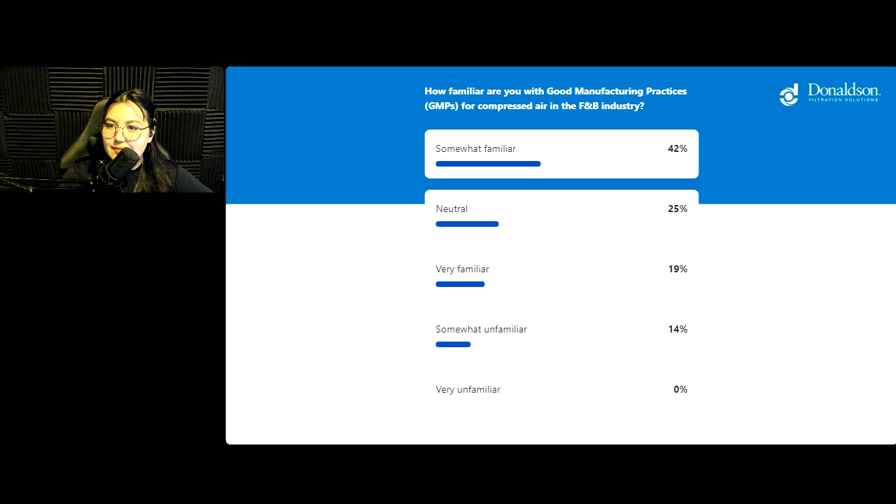All right, thanks everyone. Hopefully, no matter how familiar you are, you will still learn something new today. First off, we're going to get into what some of the regulatory standards in place are for the food industry, as well as why they exist and how they came to be.

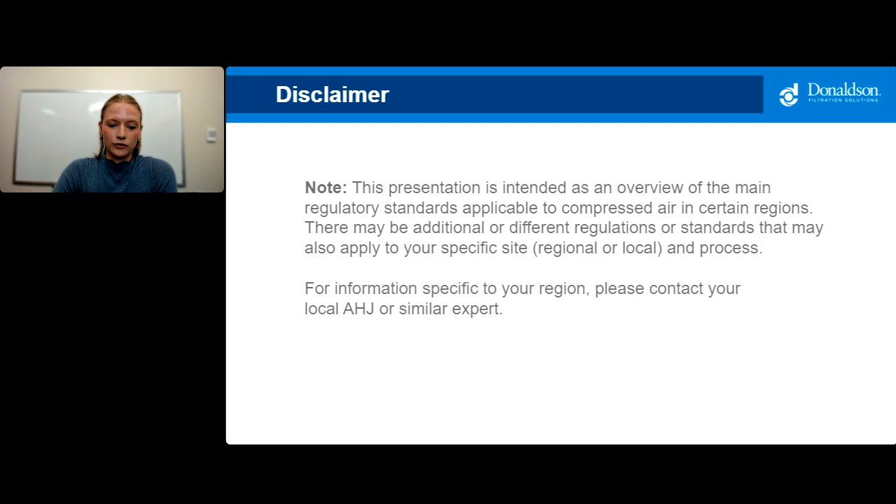Before we get started, we want to remind you that this presentation is intended as an overview of some of the regulatory standards applicable for compressed air in certain regions. As there are many regulations globally, there may be additional or different regulations or standards that may apply to your specific process. Please contact your local authorities having jurisdiction for more information specific to your region.

Regulatory standards for compressed air that comes into both indirect and direct contact with food and beverages have only been explicitly outlined since the International Organization of Standardization, or ISO, implemented 8573 in 1991. Since then, several governing bodies have developed standards such as IFS, FDA, SQF, just to name a few, that specify the filtration needed to stay compliant with these regulations.

Clean, dry air, regular testing, and point of use need to be at a certain level of filtration. While some are more specific than others, as you can see from this table, by following the GMPs outlined here, you'll ensure that your facility is compliant with even the tightest regulations.

Clean, dry air ensures not only less downtime due to system leaks or the need for equipment maintenance, which in turn keeps production running smoothly, but also mitigates the risk of contamination of products that may result in illnesses or recalls.

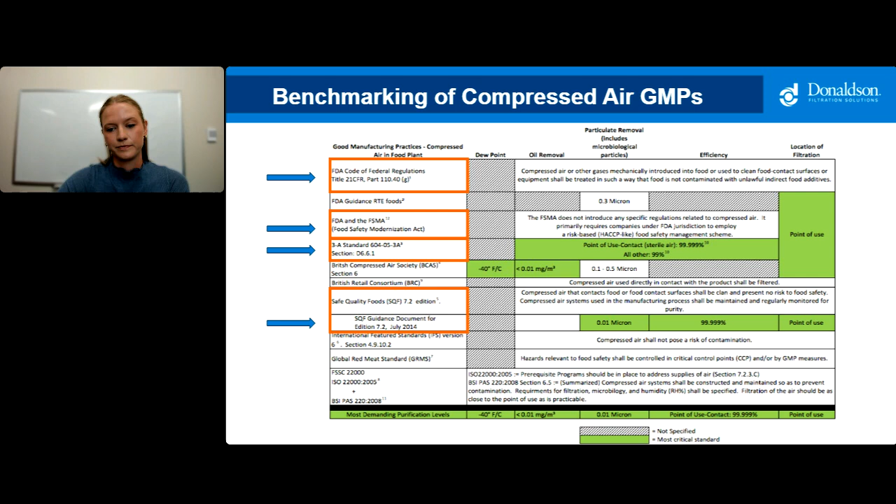The IFS food standards focus on food safety and quality management systems that are designed to help companies comply with legal requirements and customer expectations. They cover areas such as food safety, traceability, and product labeling. These standards were developed by the German Retail Federation in collaboration with retailers and industry experts.

Standard for... got into the next slide there.

The FDA food standard: while the FDA does not have specific regulations for compressed air in the food industry, food manufacturers are responsible for ensuring the safety and quality of all components of their production process, including their compressed air. By following good manufacturing practices and implementing proper maintenance procedures, food manufacturers can help prevent contamination and ensure the safety of their products.

The FDA Food Safety Modernization Act was enacted in the US in 2011 with the aim to prevent foodborne illnesses and improve food safety by shifting the focus of the industry from responding to contamination incidents to preventing them before they happen. One of the main components of the FSMA is the establishment of preventative controls for both human and animal food production. This requires facilities to implement a risk-based food safety management scheme to identify and address potential hazards in their production processes.

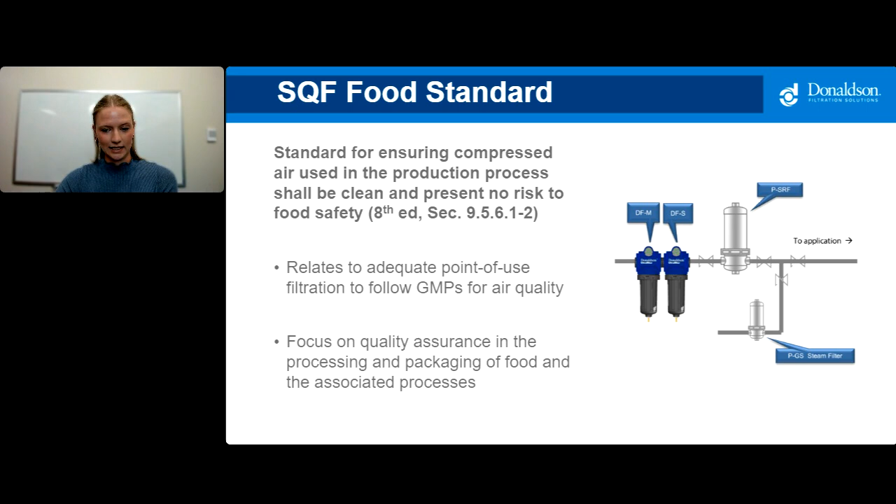Next up, the British Compressed Air Society, or BCAS, represents manufacturers, distributors, and users of compressed air in the UK. Together with the British Retail Consortium, they developed the UK Code of Practice for Food Grade Air in 2006, which focuses on three main areas: contact, non-contact high risk, and non-contact low risk.

The first two are held to the same standards shown, while the latter is set as its own category so that the facility's plant air is not held to such a stringent standard. The BCAS also publishes statistical information about the state of compressed air equipment in the UK.

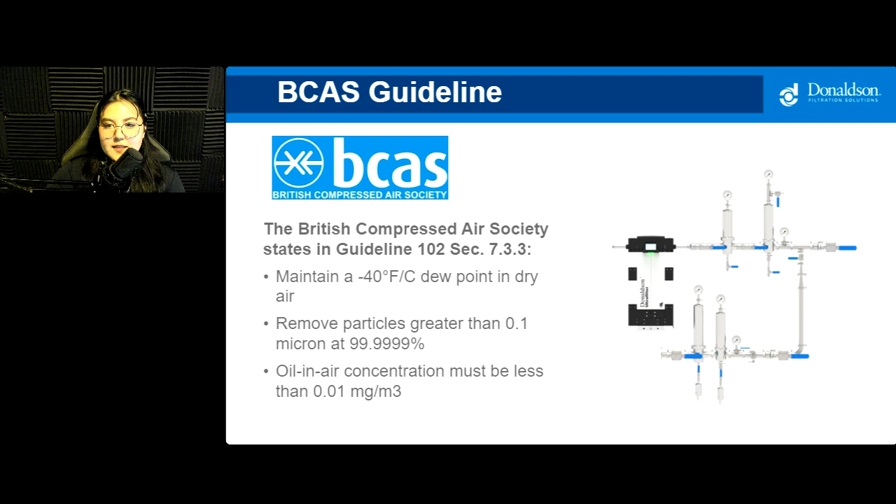The question this time is, how frequently does your facility review and update its GMP protocols for compressed air systems? Annually for A, B every couple of years, C every 5 years, D only when there are regulatory changes, and E, we do not have a regular review.

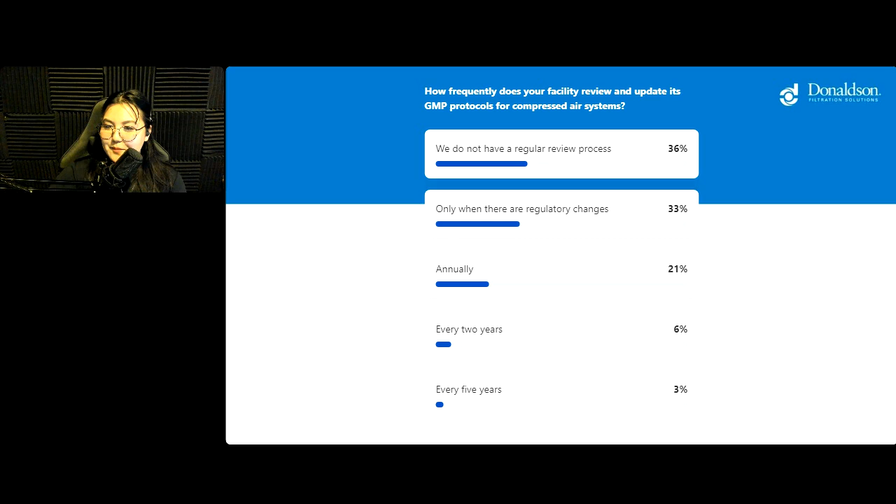All right, now that we understand what standards are in place and what regulations to follow, we can get into how to achieve those standards in your facility. And this is just a reminder that as questions come up during the presentation, feel free to keep putting them in there so we can address them at the end.

So we'll start with the industrial side of compressed air, which is classified by the ISO 8573-1 standard. Ambient air in the facility contains contaminants in the form of dirt, moisture, and oil, and all can cause issues downstream, especially when the vapor condenses at various points across the system. As a sterile filter at your point of use is not designed to remove various particulate, only microorganisms, it's really important that they're removed upstream.

Compressed air is considered a utility and can often be overlooked when a facility is developing their hazard analyses.

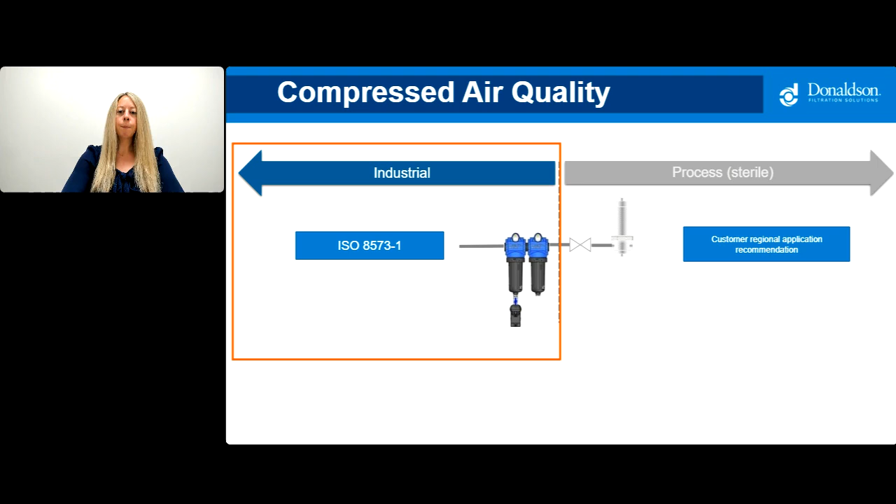The ISO 8573-1 sorts compressed air quality into different classes based on the maximum allowable concentrations of particles, which is in column A, water, which is in column B, and oil in column C, present in the air.

And using the table, you can determine what equipment you need in place to achieve the necessary air quality for your specific application. For example, the BCAS standard is 221 for both direct and indirect food contact, where non-food contact compressed air has a more relaxed 242. So the lower the numbers, the tighter the spec is going to be.

And Class 0 requires defined specs outlined by either the user or the supplier and is more stringent than Class 1, but there has to be some definition in place to comply with that.

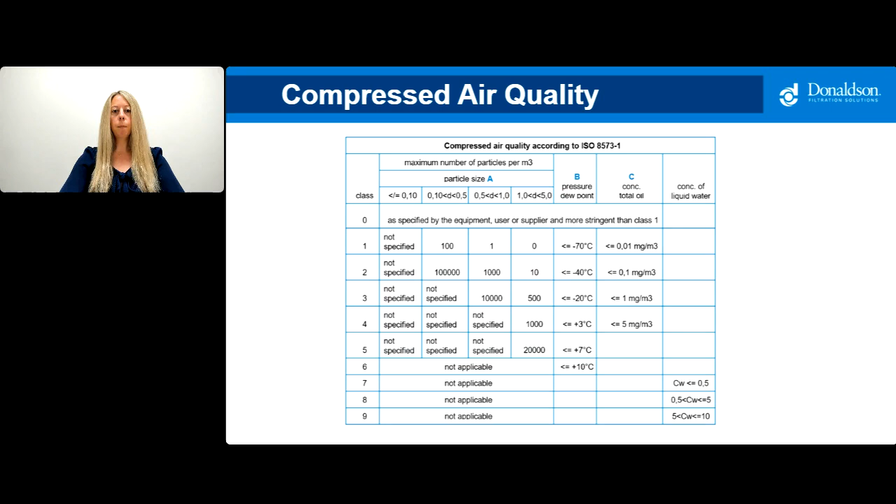Depending on the parameters of your current system, you'll select the filters you need to help you achieve the chosen ISO class depending on the following factors: what kind of compressor you're using, is it oil-free, and what type of dryer.

For example, the highest class the refrigeration dryer can produce is 4. So an adsorption dryer would be needed downstream for any critical control points. If you're looking at plant air or tools, a refrigeration dryer is fine.

And then are there any filtration steps upstream of your critical points of use? Performance data of the filters themselves are compared against another ISO standard, 12500, which ensures it's validated and will filter air in compliance with the class that you select and need to be able to fit.

The housing combination and filter combination best for your facility will depend on where they're installed, but to meet or exceed the standards that Julia just outlined - SQF, GFSI, CFR Title 21 - you'll have to have a particulate filter, a coalescing filter which removes oil and oil aerosols as well as any solid particulate, and an active carbon stage which removes oil vapor, hydrocarbons, and any odors from compressed air.

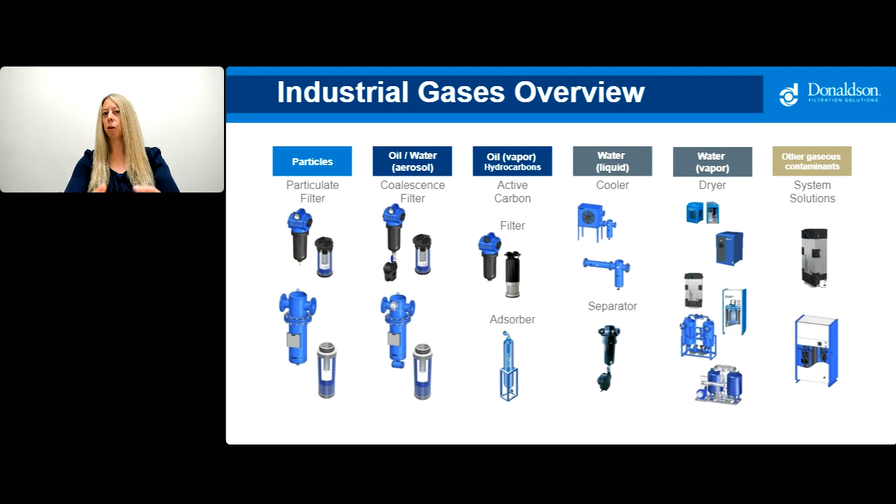Sometimes these stages can be combined, but it's important to look for that ISO 12500 standard to know that it's validated for what you need it to do. If the line is going to be steamed in place for sanitization, the housings will have to be stainless steel, and the filter elements may change, but their function and the order of install will remain the same.

In addition to providing the required pre-filtration for sterile air, the production of clean, dry air keeps fouling of equipment to a minimum, which makes sure the facility keeps running smoothly and efficiently, so you avoid downtime and added maintenance cost. Important parameters include oil and moisture content, as well as any filtration upstream. These factors will determine which filters are needed to remain compliant further down the line.

The filtration discussed previously will be coming directly off the compressor or storage tank, or in line both upstream and downstream of the dryer. That depends on the installation location and class required. For instance, if you've got point of use that's going to be outside, you would have your adsorption dryer inside, and then other things in between that and the point of use that can handle any temperature swings. If we move into the sterile side, the final point of use filter will be in a sanitary stainless steel housing.

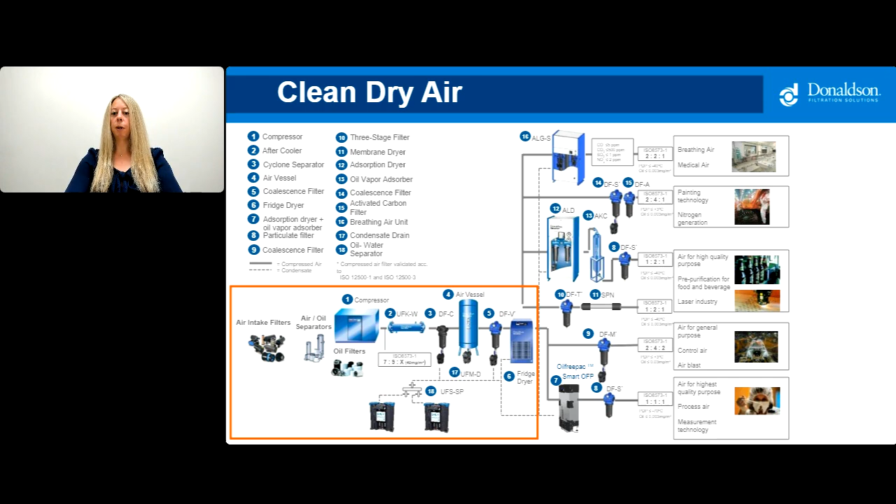This is an example. It shows a setup or installation of an air filtration system. The type of dryer chosen will depend on the quality of the air you'd like to achieve. A refrigerant dryer might be a more economical choice, but can only lower the dew point to around 3 to 5 degrees C, or up to class 4 - sufficient for most industrial and plant air applications or tools.

In instances where the more critical classes of clean, dry air or sterile air are needed, an adsorption dryer is necessary to hit that negative 40 dew point. As class 1-2-1 air is seldom required throughout your entire facility, the adsorption dryer and subsequent sterile air filtration can be sized and installed closer to point of use.

This point brings us to the next poll question regarding use. Seth?

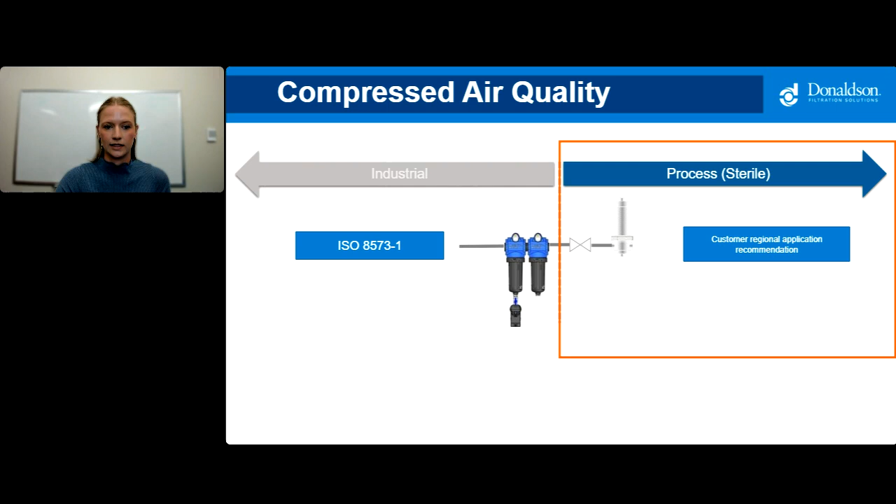Contaminants can be introduced into the process from many different sources. Airborne particles such as dust and dirt can enter the system from ambient air. Oil and lubricants can come from the compressor itself or other fluids used in production. And of course, personnel and operators can bring contaminants from outside the production area if the proper precautions aren't taken.

Microbiological contamination is the most critical, which is what we are removing with sterile filtration. Other important steps to remove these microbiological contaminants are proper clean in place and steam in place procedures.

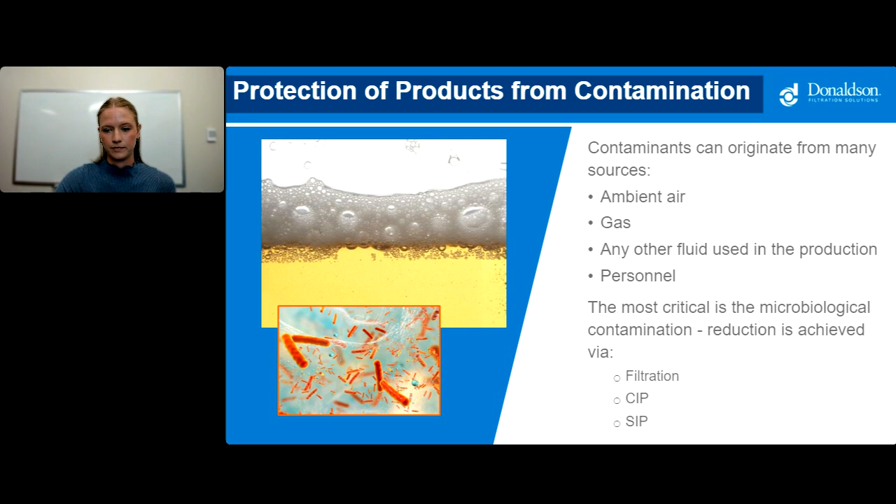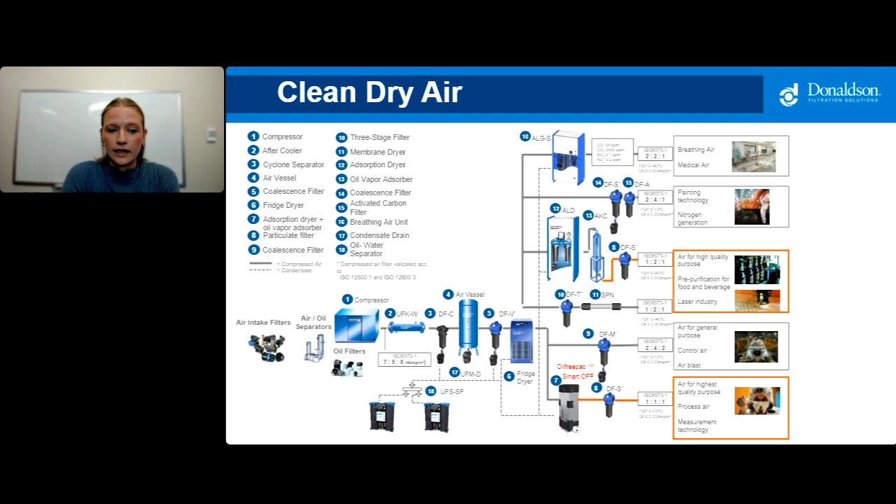So now, how clean does this clean dry air have to be? This depends on where it's installed and what it will be used for. Looking at the right side of this process map, we see that specific applications require different levels of compressed air. For example, the highest quality, class 1-1-1, is used for things like process air and measurement technologies. This allows 100 particles between 0.1 and 0.5 microns per cubic meter, and only one particle between 0.5 and 1 micron per cubic meter. For reference, the human eye can see things as small as 40 to 50 microns. This class of air also requires a dew point equal to or less than minus 70 degrees Celsius and less than 0.01 milligrams per cubic meter of oil vapor.

So the type of product that you're producing, whether it's wet or dry, for example, has a lot to do with the quality of air that is necessary. So it's important to ensure your point of use air is up to code based on your specific product and regional area, and that you have a maintenance plan in place in order to not fall out of compliance.

So next, Catherine is going to talk to you about how periodic line audits can help you maintain integrity and why it's beneficial for you to do so. But first, Seth will introduce one last poll question for the audience.

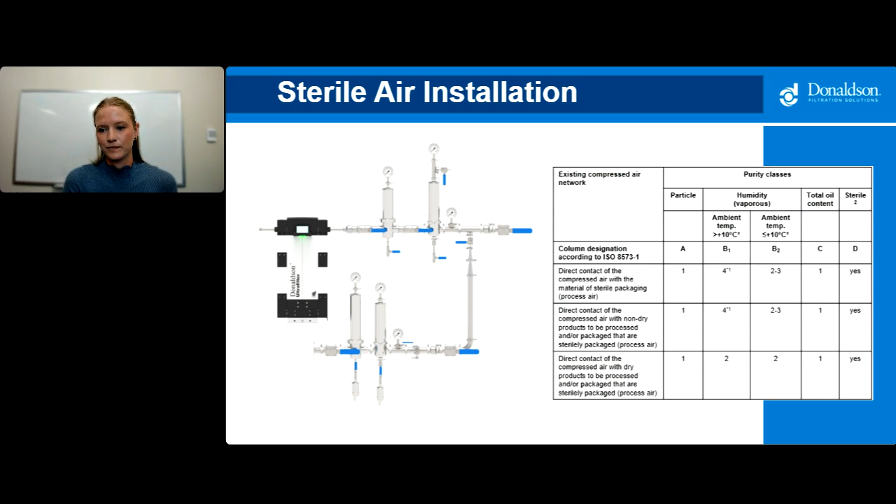All right, so the question for the last poll is, what is your concern regarding the filtration of compressed air in your facility? There's quite a few different answers here, so please pick the one that is most related to you. So we have A, ensuring compliance with food safety standards. B, maintaining consistent air quality. C, reducing maintenance costs. D, extending the lifespan of equipment. E, improving overall production efficiency. And F, other. And if you're just joining us, welcome.

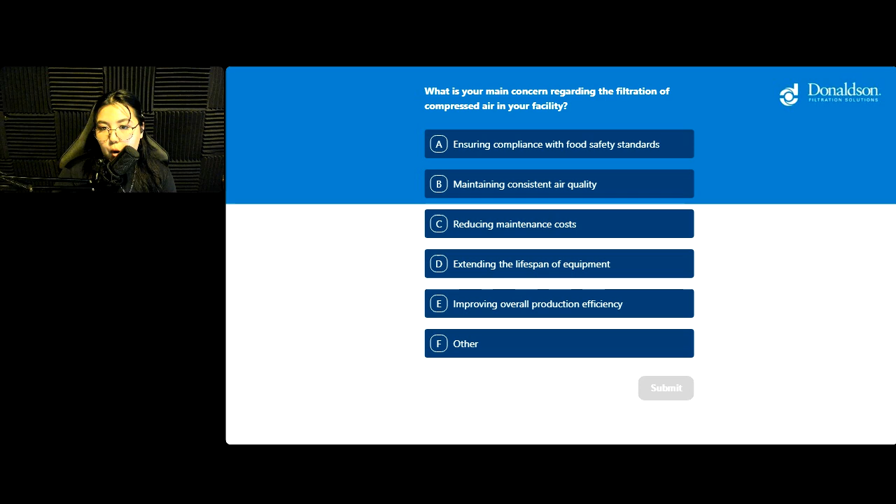We're currently running a poll and getting everyone's thoughts on filtration concerns. Now, I can see the majority has inputted their answer, so let's take a look at the final poll results. And here they are. You should see them on your screen. Very interesting. And this is a great note to end on, and it gives us a clear picture of your thoughts and experiences.

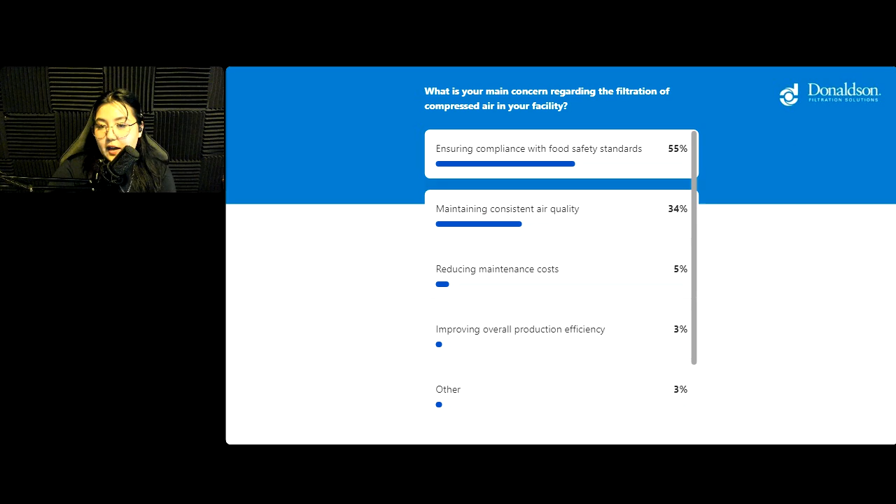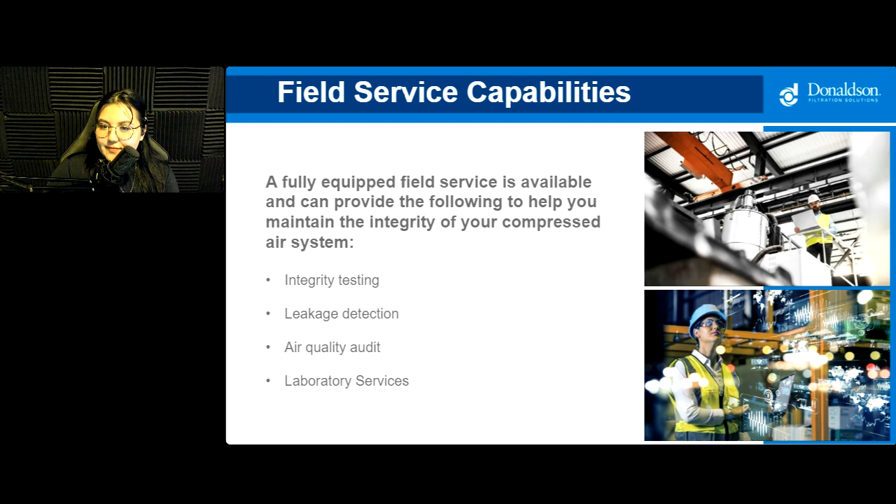And with this final insight, I'd like to pass it back to Catherine one last time. Right, given that most people are concerned about keeping with compliance, something that we can offer, or that it's important to look for maybe in a partner when you're looking at your compressed air system and how to stay in compliance, are kind of what their services are.

So capabilities of any field service teams to look at your line integrity, and what that means not only for cost savings in terms of efficiency and the way that the plant is running, but also keeping in line with all the different standards for on-site filter integrity testing, documented results, periodic line audits.

You can determine areas of any potential concern along that line. If the line expands or you're adding different points of use, then having an eye or sometimes like fresh eyes over the line can really help you see anything that you might want to take care of.

It could also help identify where losses can occur, such as condensate drains, and offer solutions that not only cut air loss during discharge, but also assist with more effective and environmentally sound condensate management.

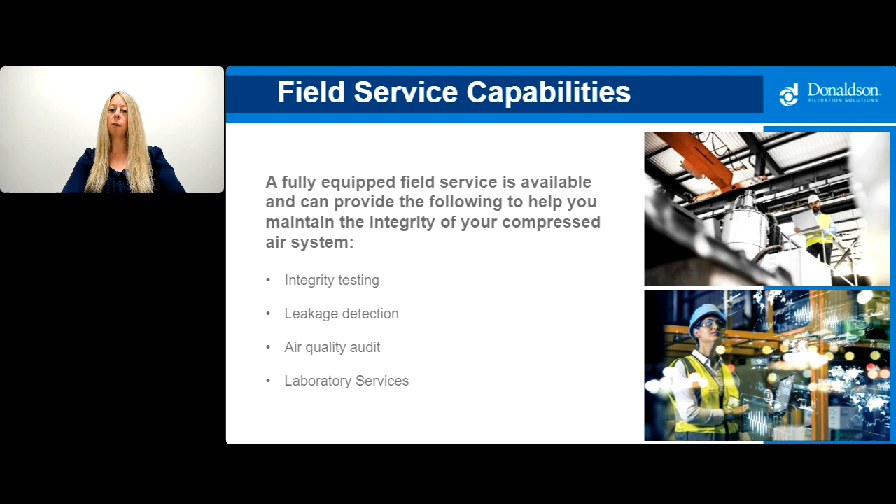Aside from the regulatory compliance, another factor to consider in your compressed air system is the operational efficiency. As a utility, one of the most important parameters is the differential pressure generated across the compressed air treatment. And higher differential pressure translates to a higher load for the compressor and thus higher energy costs.

On average, for every 1 bar of differential pressure, there is about a 10% increase in energy cost. This is important to bear in mind when you're sizing your system as well. The various components are designed for certain flows to keep the strain and pressure differential as low as possible, and therefore as efficient as possible.

And to this end, the field service team can help determine an efficient preventative maintenance schedule for your facility, which takes into account energy use, system demands, and filter cost.

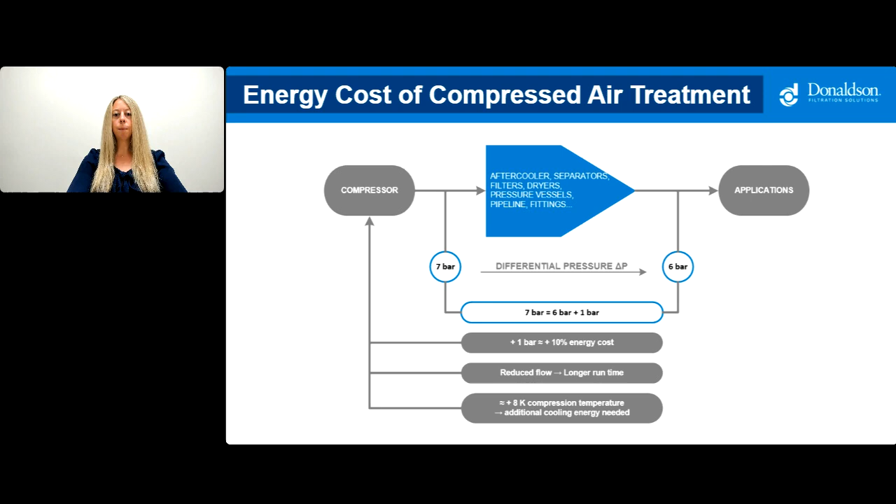Any air quality assessments include bacterial counts and quality measurements, such as residual oil and particle content, volume flow, and working pressure, as well as flow velocity within the system.

This will conclude the lecture part of the webinar.

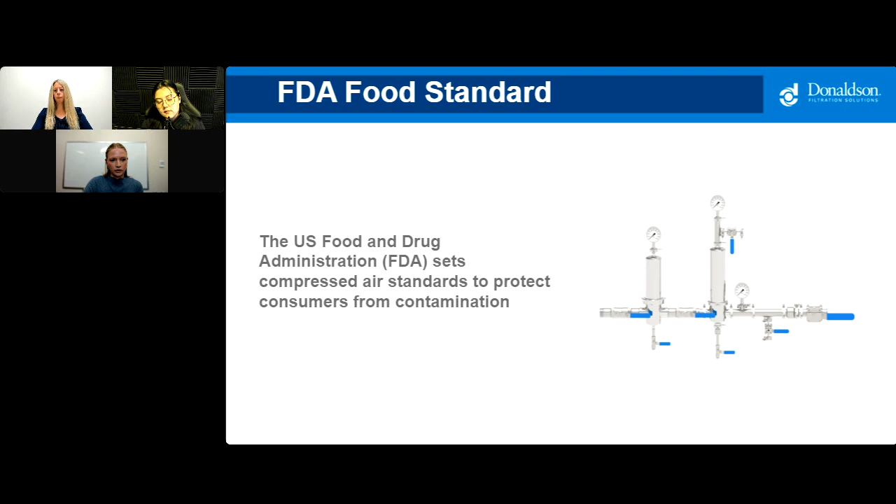So they don't necessarily have specific regulations for compressed air in the food industry. If we want to go to the next slide, this is FDA governed, so the FSMA food standards. So it's going to depend on what your product is. It's probably, if it's food contact, probably 121 or 111 quality air that you're going to need.

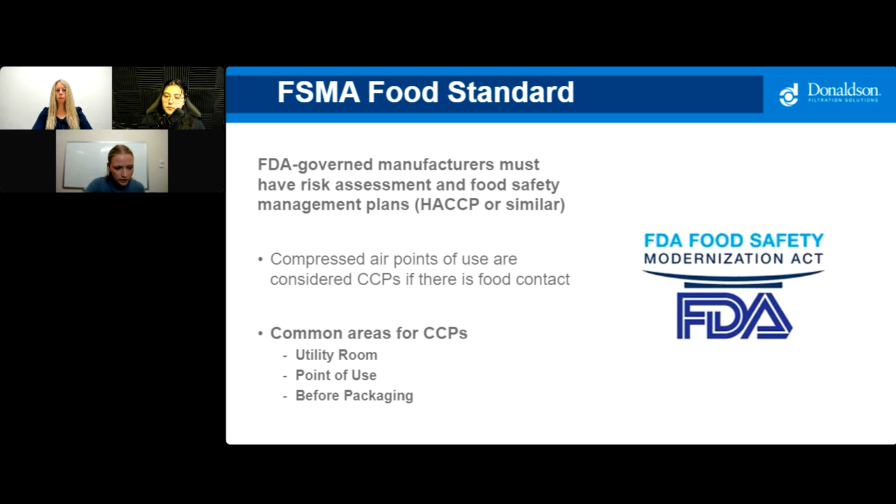The FDA is a little tricky because with the Food Safety Modernization Act, you're required to have these HACCP plans in place, but unless it's like a dairy 3A standard, or you're conforming to another set of standards that outline specifics, it's just expected that you have some sort of audit plan in place. And that's something, depending on the product and the use, we can help you determine to make sure you're following all these best practices.

Great, that was a fantastic question, thank you both for your answer. And I'll ask this final question before we close our live Q&A session. Does a lone sterile filtration system effectively remove microbial contamination, or does it have to be collaborative with bottle cleaning for liquid contact?

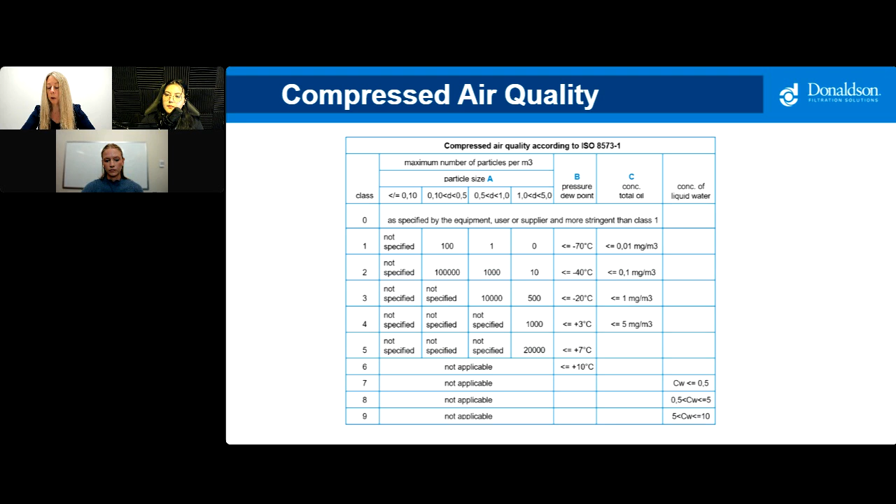Okay, this sounds like a follow-up from the one before. It's really going to depend, I think, on your supplier and what you're filling it with. Like if you're purging the bottles with sterile air and filling it with beer or something with alcohol, that can probably mitigate that. For standalone non-alcoholic products, I think it really depends on the supply of it and the facilities management.